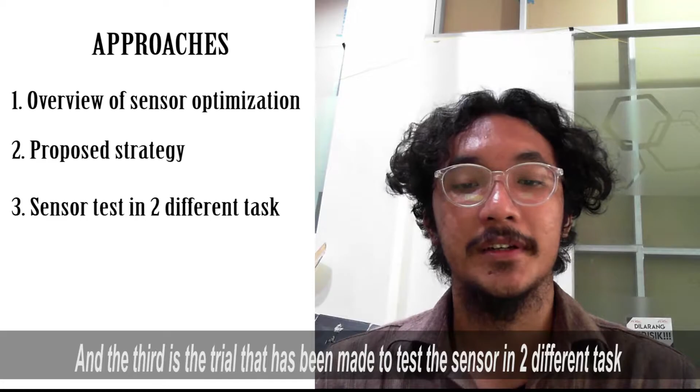The second sensor is the magnetometer, also known as compass. The sensor is built and integrated in our main controller, Pixhawk PX4. By sensing the Earth's magnetic field, the sensor will update information on the heading of the boat.

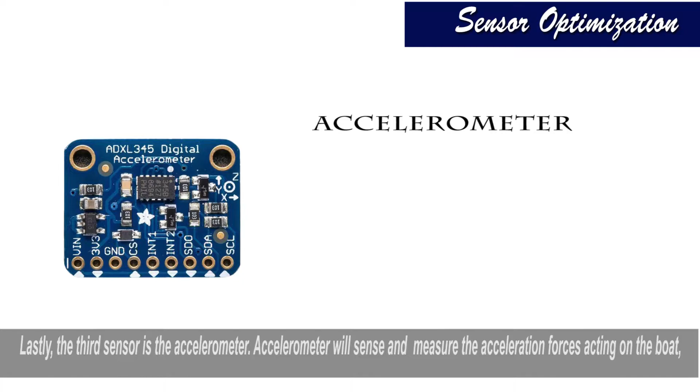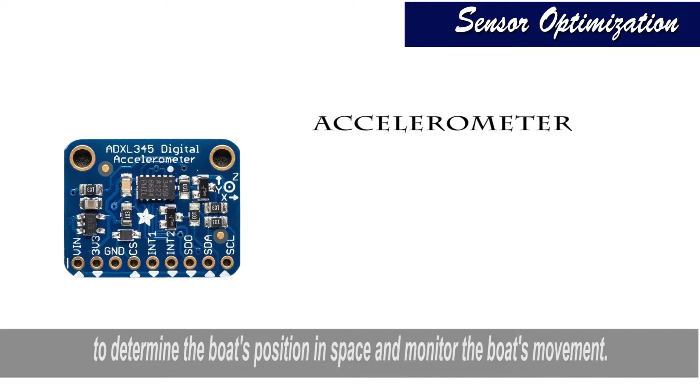Lastly, the third sensor is the accelerometer. The accelerometer will sense and measure the acceleration force acting on the boat in order to determine the boat's position in space and monitor the boat's movement. By combining these sensors, a good navigation solution will be achieved to track the desired waypoint for the boat.

By learning from the previous competitions, some improvements needed to be made, especially for the sensor optimization. Therefore, to advance the use of the sensor, we have implemented the boat controller design on the PX4 software. The boat controller has two main blocks. The first one is the EKF. The second one is the position and attitude control.

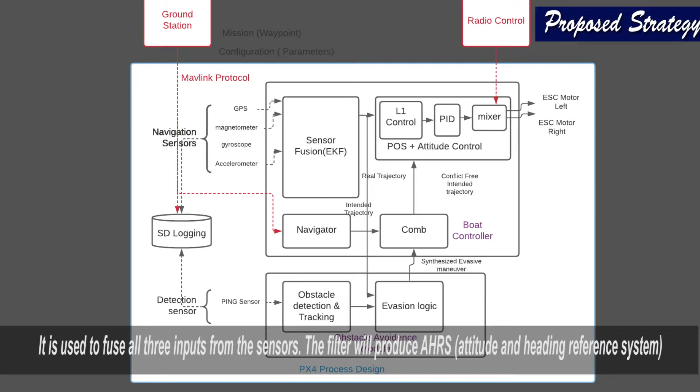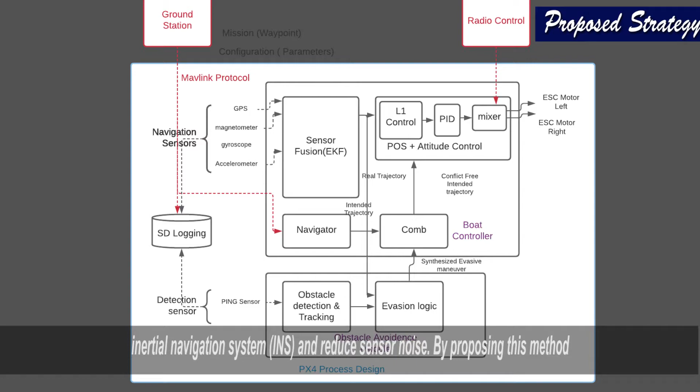EKF, which stands for Extended Kalman Filter, is very well known for performing the best sensor computation. It is used to fuse all three inputs from the sensors. The filter will produce AHRS, or Attitude and Heading Reference System, Inertial Navigation System, or INS, and reduce sensor noise. By proposing this method, data acquisition from the sensor will be more accurate to process by the controller.

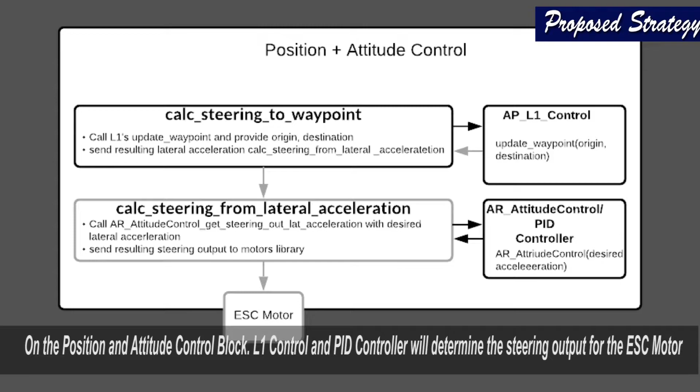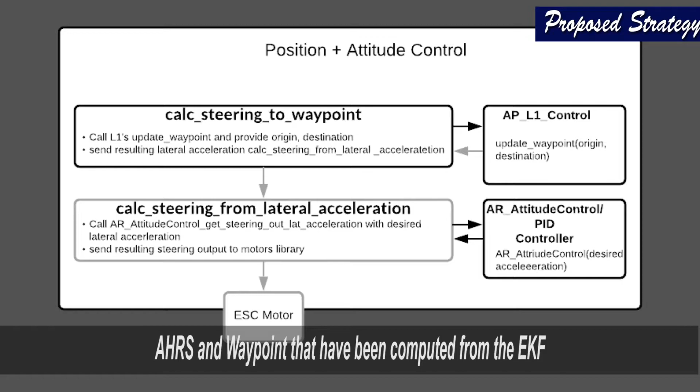On the position and attitude control block, L1 control and PID controller will determine the steering output for the ESC motor. L1 control has presented superior guiding performance on curved trajectories, so adding this method will smooth this control output. AHRS and waypoint that have been computed from the EKF then will be used to update the waypoint and produce the desired acceleration with L1 control.

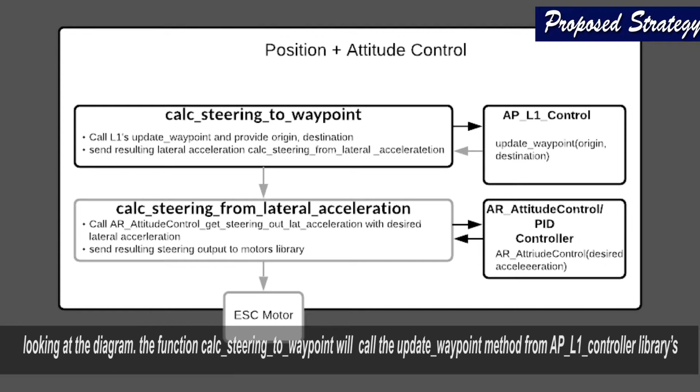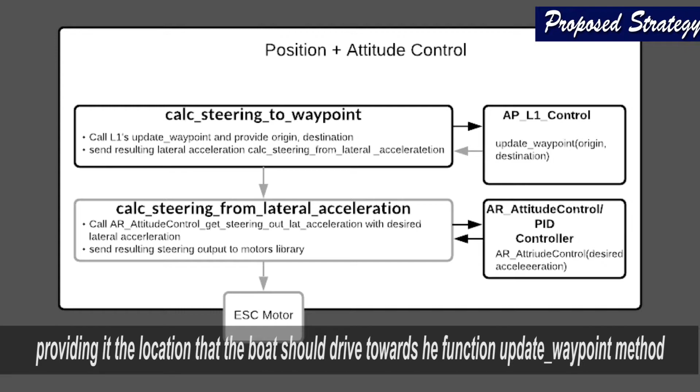Looking at the diagram, the function calculate steering to waypoint will call the update waypoint method from AP_L1 controller libraries, providing it the location that the boat should drive towards. The update waypoint method on the AP_L1 controller returns a desired lateral acceleration, which is passed into the mode's calculate steering from lateral acceleration.

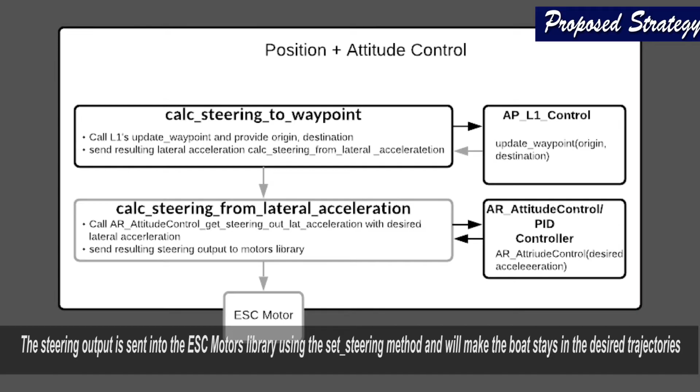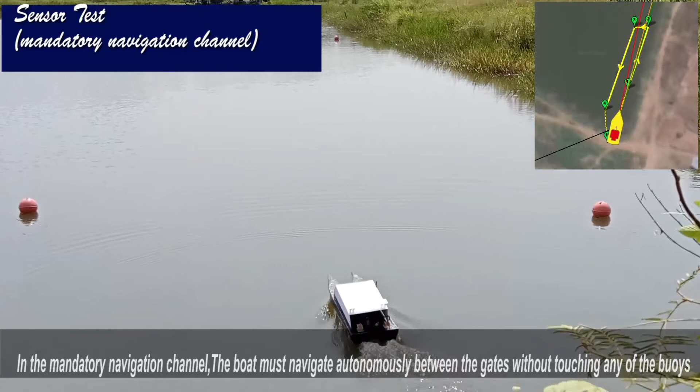In this section, we have made some trials to test the sensor, both mandatory navigation channel and speed gate challenge. In the mandatory navigation channel, the boat must navigate autonomously between the gates without touching any of the buoys. By looking at the footage, it is shown that the boat autonomously navigates 6 feet from the gate, and by placing several waypoints, the compass, GPS, and accelerometer automatically send the navigation information and update the changes.

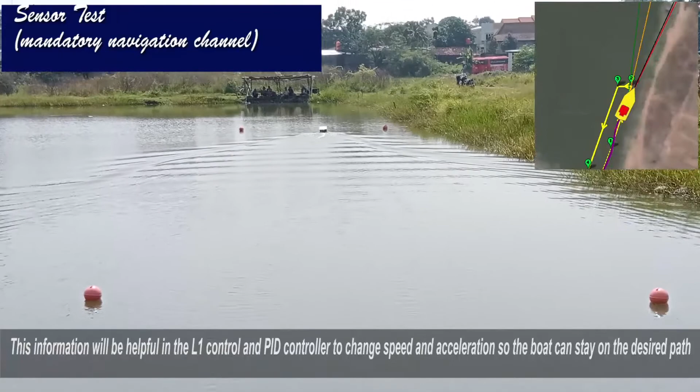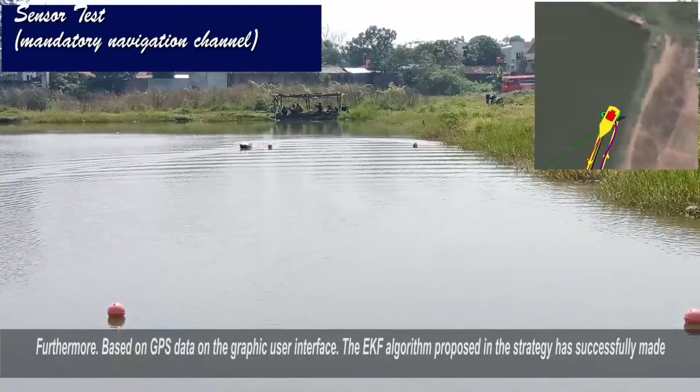This information will be helpful in the L1 control and PID controller to change speed and acceleration so the boat can stay on the desired path. Furthermore, based on the GPS data on a graphical user interface, the EKF algorithm proposed in the strategy has successfully made the navigation information accurate. It makes the boat track the actual waypoint smoothly.

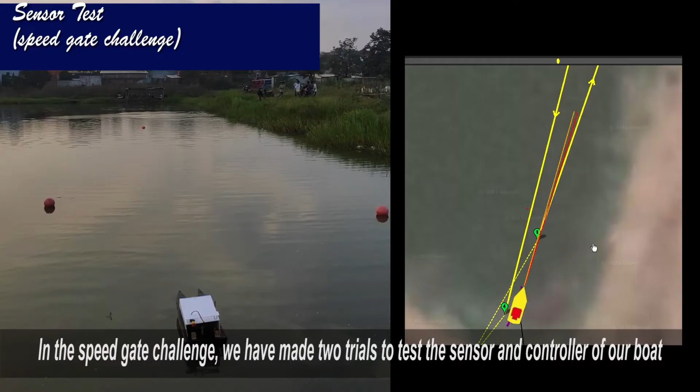In the speed gate challenge, we have made 2 trials to test the sensor and controller of our boat. In the first trial, the sensor sensed the navigation information accurately, but some oscillations occur in several trajectories. It is mainly because of the changed parameters affected by the water wave. Thus, in the next trial, we have made some improvement by tuning the PID controller of the boat.

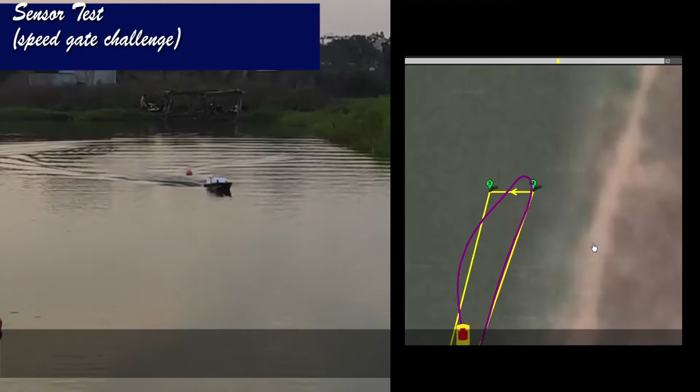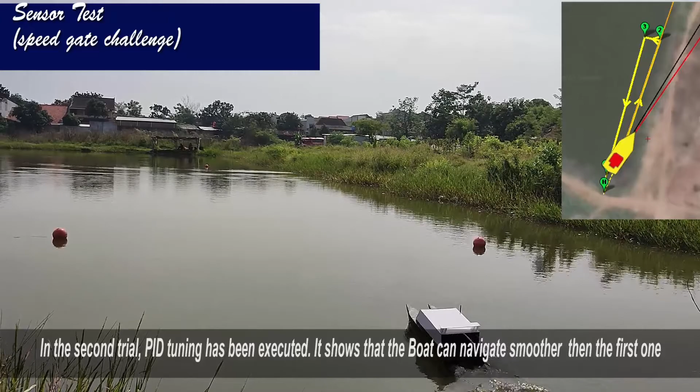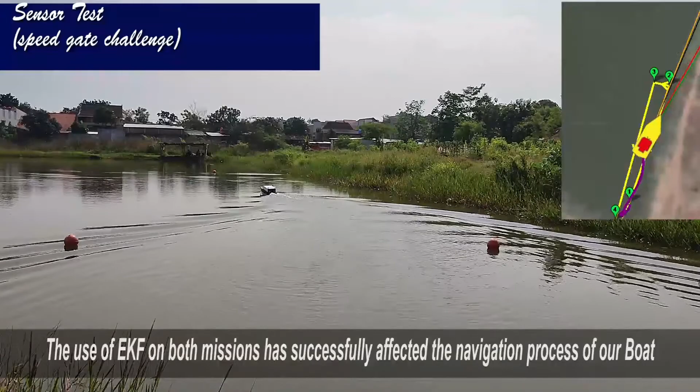In the second trial, PID tuning has been executed. It shows that the boat can navigate smoother than the first one. The use of EKF on both missions has successfully affected the navigation process of our boat. Although there is some room to improve, the boat can moderately perform better in navigation in both missions.